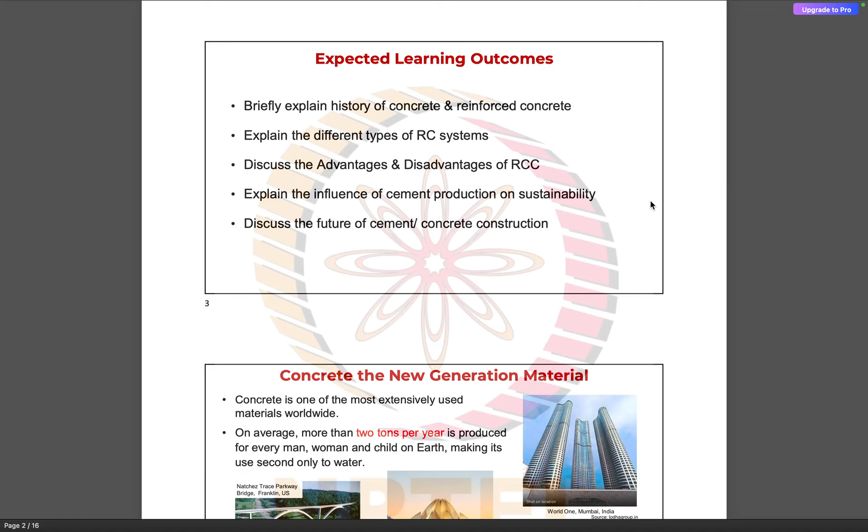So we first saw the history of concrete and reinforced concrete. Then we saw the different types of RC structural systems. Then we discussed the advantages and disadvantages of RCC. Then we saw the influence of cement production on sustainability, because environmental sustainability is a very important topic these days. Then we also discussed the future of cement concrete construction.

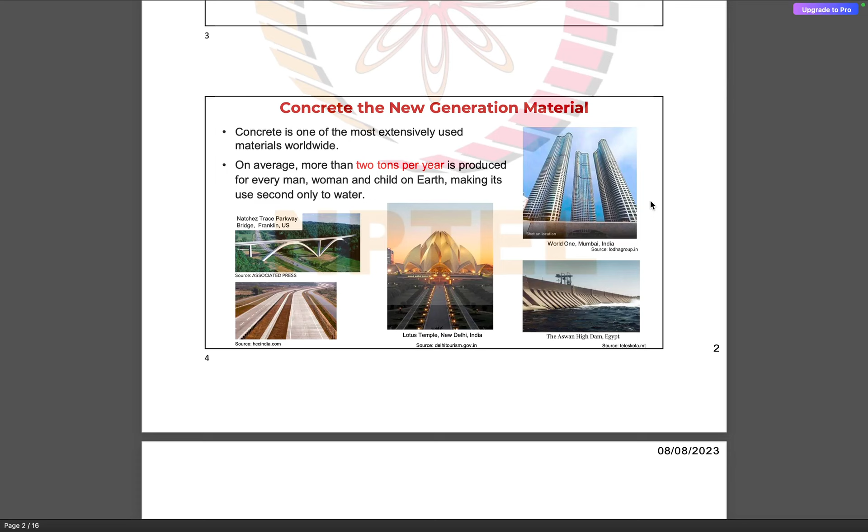So here, in this slide, we saw that there is a huge amount of consumption of concrete these days, and it is second only to water.

Then we saw a brief history of the evolution of reinforced concrete buildings, starting from John Smeaton and his discovery of concrete, followed by the discovery of Portland cement, and then Joseph Monier and the Hennebique system, which is very close to the present reinforced concrete construction.

Then we also saw some of the historical structures which have been constructed using reinforced concrete. For example, the Roman Pantheon, which was constructed using concrete almost 1900 years back, and it is still standing, which is testimony to the durability of concrete as a construction material.

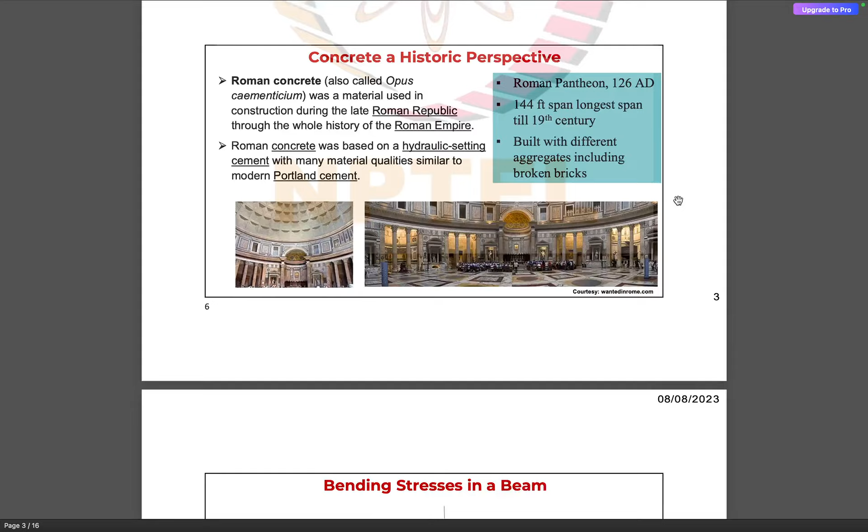Then we discussed the bending stresses in a beam, what happens when a beam is subjected to flexure, how it is subjected to compressive stresses and tensile stresses, which are separated by a layer of zero stress, which is also called the neutral layer or neutral axis. Then we saw the Hennebique system, which was developed by a French engineer.

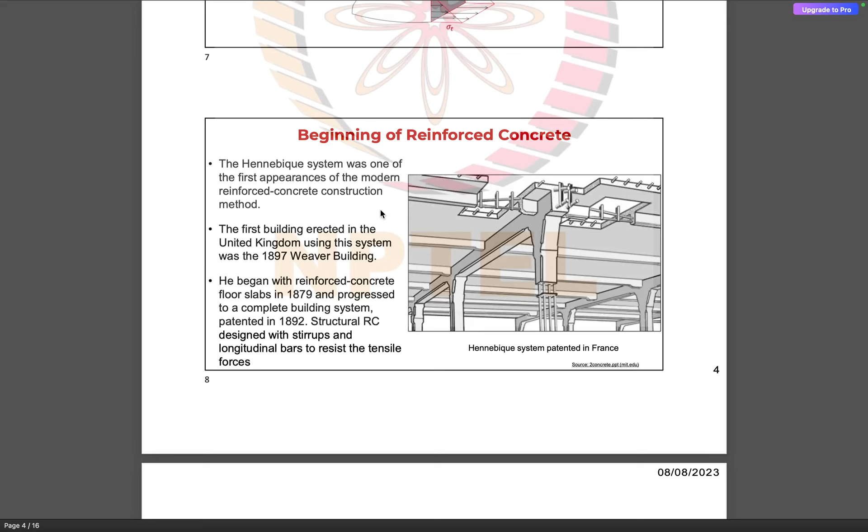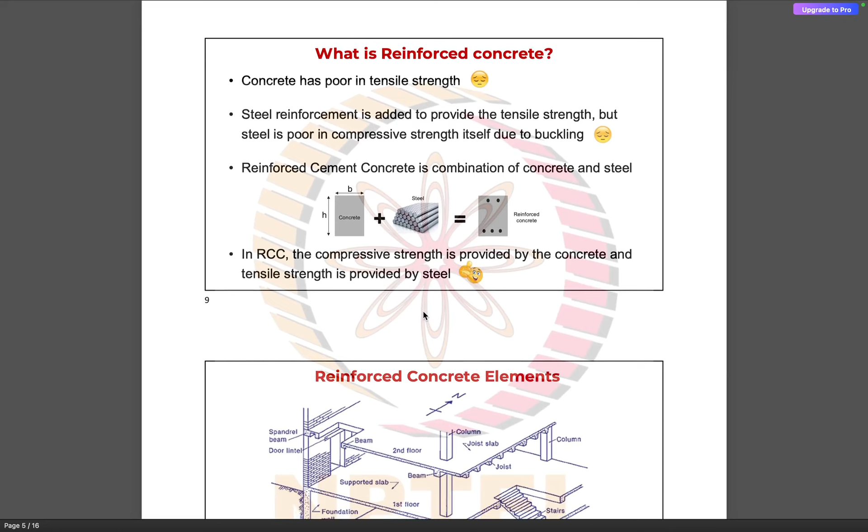Then we saw that concrete is essentially poor in tensile strength, and it must be combined with steel in order to attain the desirable tensile properties. And then we saw how both of them are compatible with respect to the thermal expansion coefficient, which makes it a very useful material for construction.

Then we saw the different components or elements used in reinforced concrete construction. For example, the load is initially applied on the slabs, which is then distributed to the beams and further to the columns, and then eventually to the lower story columns, followed by the foundation, and ultimately all the forces are transmitted to the soil.

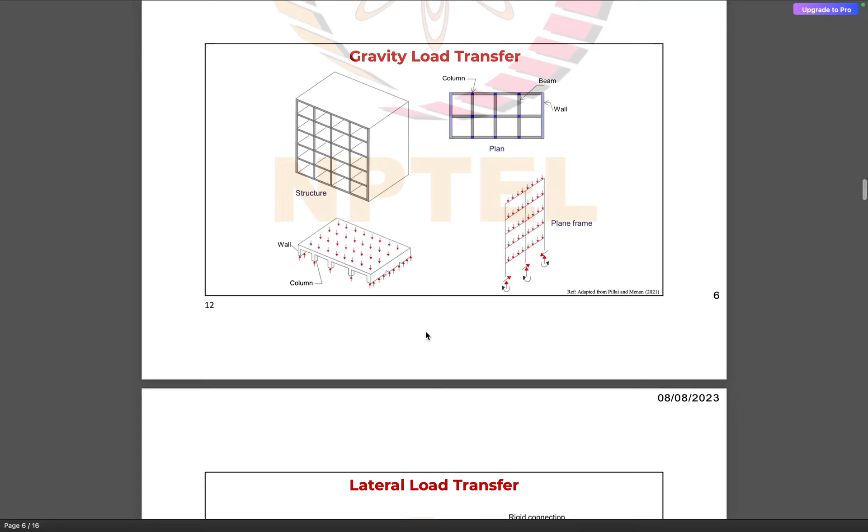So then we looked at the different systems, such as the flat slab system. Then we saw the gravity load transfer and the lateral load transfer. So essentially in the analysis and design of a building, the gravity load elements and the lateral load elements are considered separately, and it is going to be discussed in future lectures how to consider their design.

So then we looked at some of the very interesting structural systems on which present reinforced concrete construction is based. We started with the non-rigid frame, followed by the rigid frame, then the braced frame, outrigger trusses, tubular systems, and so on, which help us achieve reinforced concrete buildings of greater and greater heights with enhanced stiffness.

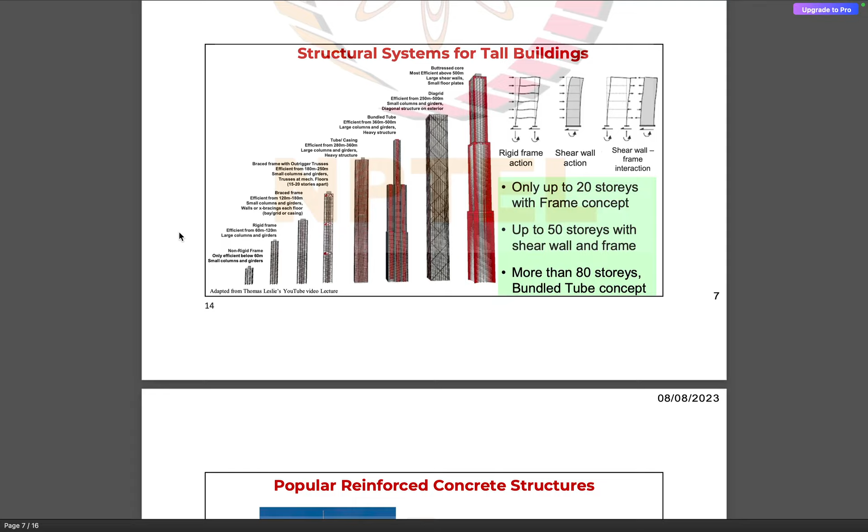Then we looked at the structural systems underlying some of the most prominent structures, such as the Burj Khalifa, which involves a tubular system, and then the Petronas Towers, which involve a tubular structure with shear walls and concrete frames. Then in our own country we have the World One Towers.

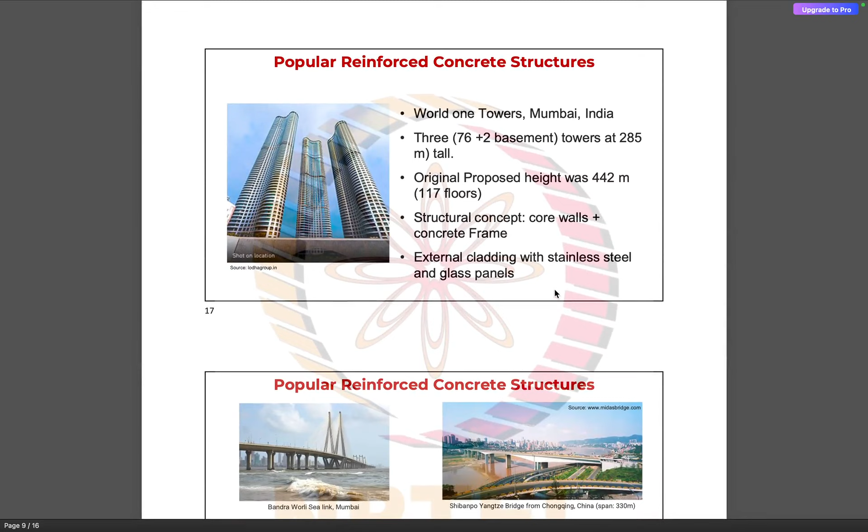Apart from buildings, we have other engineered structures also, such as the Bandra Worli Sea Link and the Sheikh Zayed Bridge, and so on. All these forms of construction are made possible because of the properties that reinforced concrete possesses. And then we looked at hydraulic structures also, such as the Gordon Dam and the Bhakra Nangal Dam.

So here we discussed some of the advantages of reinforced concrete in comparison to other construction materials, such as its higher compressive strength, greater resistance to fire and water, higher rigidity and long service life. Most of the structures have been able to sustain all these years because of the long service life offered by reinforced concrete as a material.

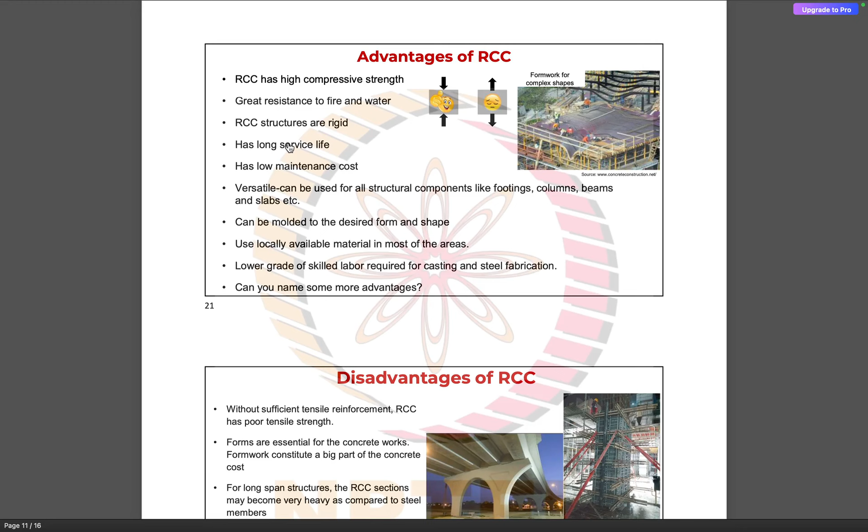Then we looked at some of the disadvantages also, such as the necessity of providing tensile reinforcement in order to make the structural elements sufficient under tensile stresses. Then formwork is an important part of the construction, which can increase the time taken and also the costs by a significant margin.

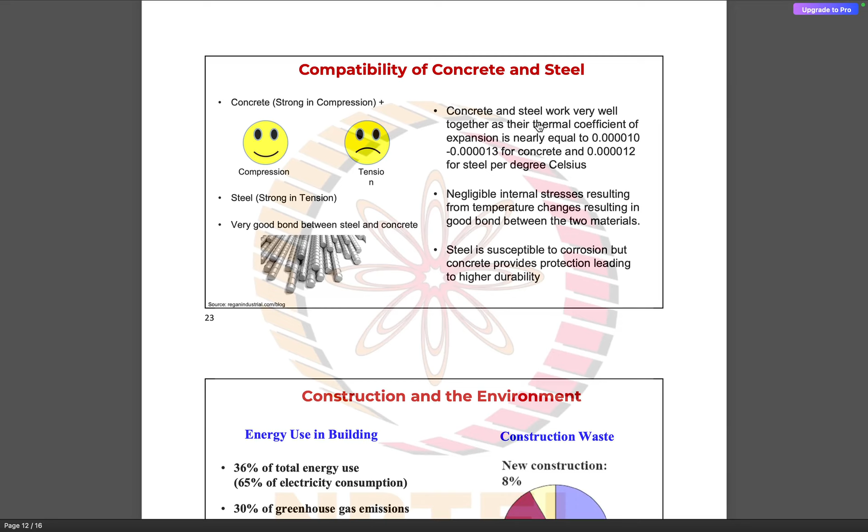Then, as I discussed, we are able to combine concrete and steel to develop reinforced concrete because they possess similar thermal coefficients, as a result of which there will be no residual stresses, and their mutual compatibility is a boon for the reinforced concrete industry.

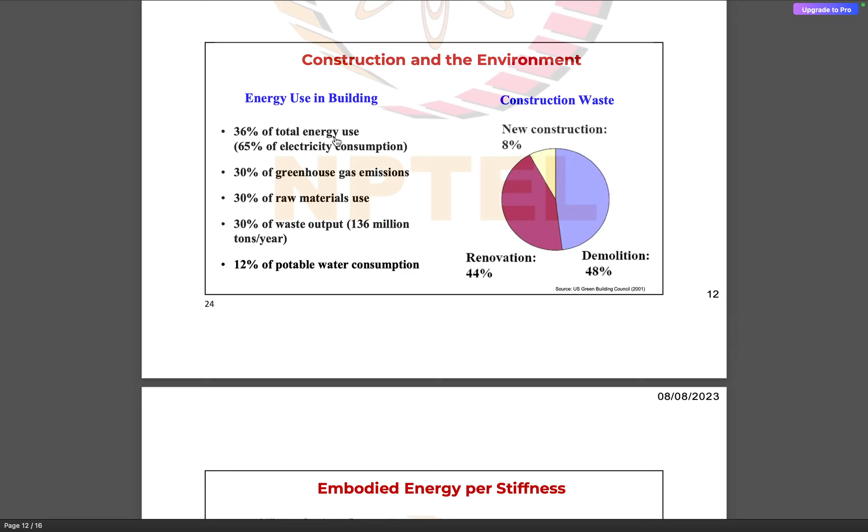Then we looked at the sustainability aspect, how buildings contribute to 36% of the total energy consumption. A lot of energy is dispensed in the manufacturing of raw materials and during the construction process. Most of you might be aware that we need to limit global warming to 1.5 degrees Celsius by the end of this century. So it is very essential to incorporate sustainability practices in our construction industry, so that we can contribute to a greener planet.

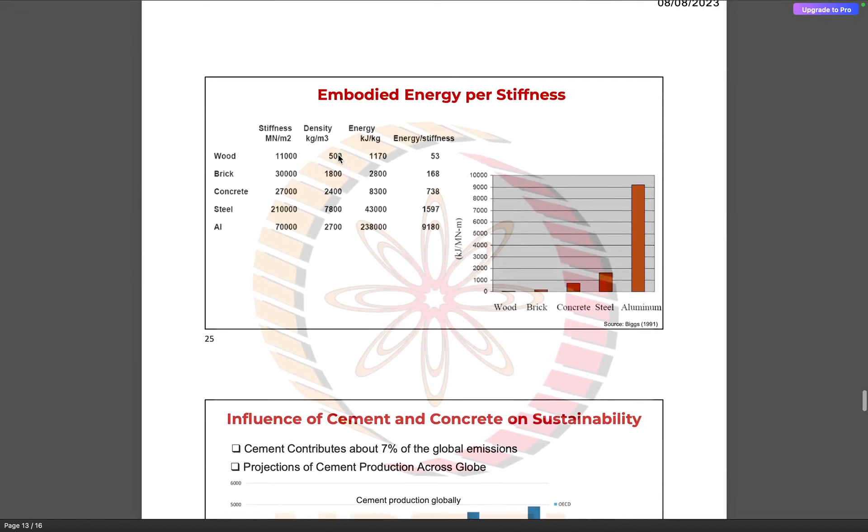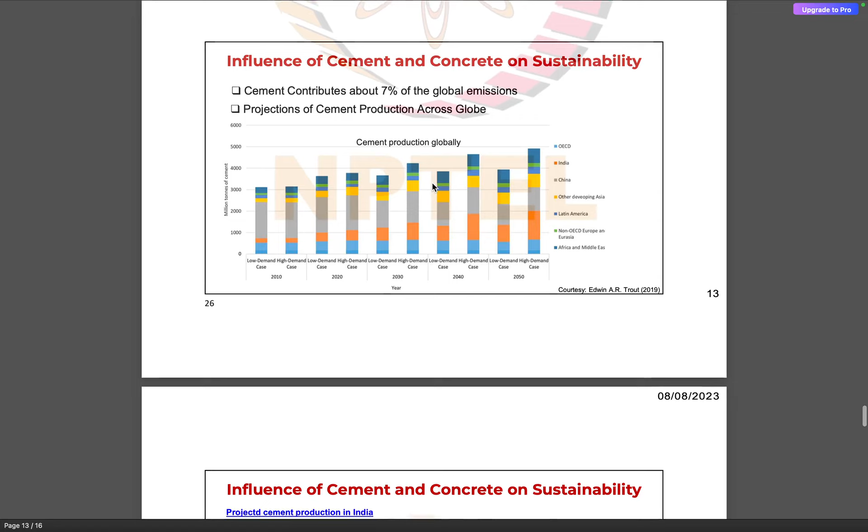So this is the embodied energy, and concrete compares very well in terms of energy compared to steel and aluminium. Then we looked at the trends of energy consumption, and we also looked at some other alternatives such as geopolymer concrete, which can reduce emissions and help us attain our sustainability goals.

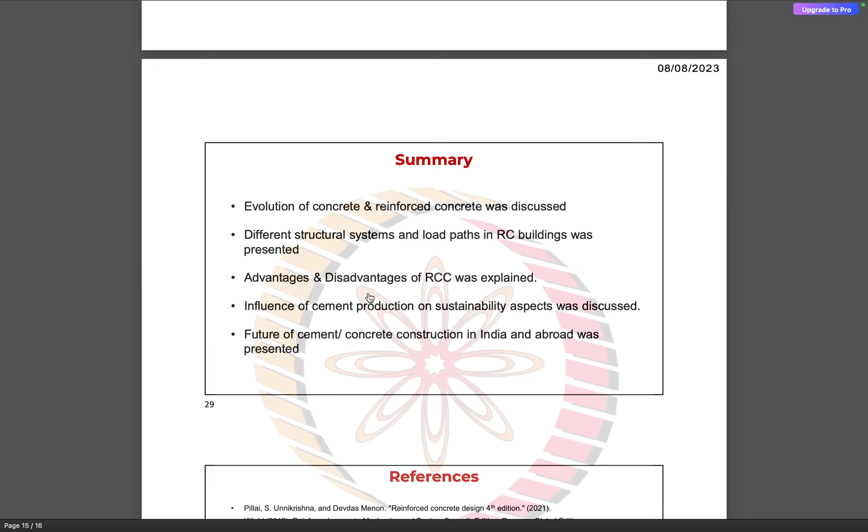So in summary, we saw the evolution of concrete, then the different structural systems, advantages and disadvantages of reinforced cement concrete, followed by the sustainability issues. So I hope all of you are with me so far.

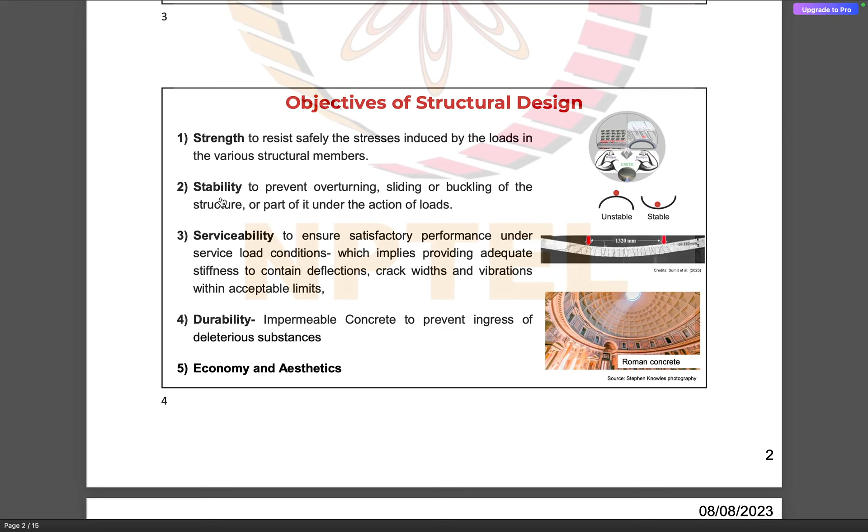So over a period of time, there have been different design methodologies that have evolved in order to help us in the design of reinforced concrete structures. Then we have looked at the difference in the design philosophy between the ACI, that is the American code, and the Indian code. So these are some of the objectives of structural design: to ensure adequate strength, stability, serviceability, durability, and economy and aesthetics. So we'll be discussing in detail about these aspects such as strength and stability in the upcoming slides.

Then these are some of the aspects of structural design we need to consider. That is, it has to be functional. We have to take into consideration the functional and safety aspects. Then we have to perform our design within certain constraints. Further, we need to follow a certain procedure in the reinforced concrete design. Then we need to take into account the different stakeholders, so that ultimately we are designing a building for the owner or the people who are going to inhabit there. So we need to work in an integrated way in order to ensure that the objectives for which the building is being constructed are being served.

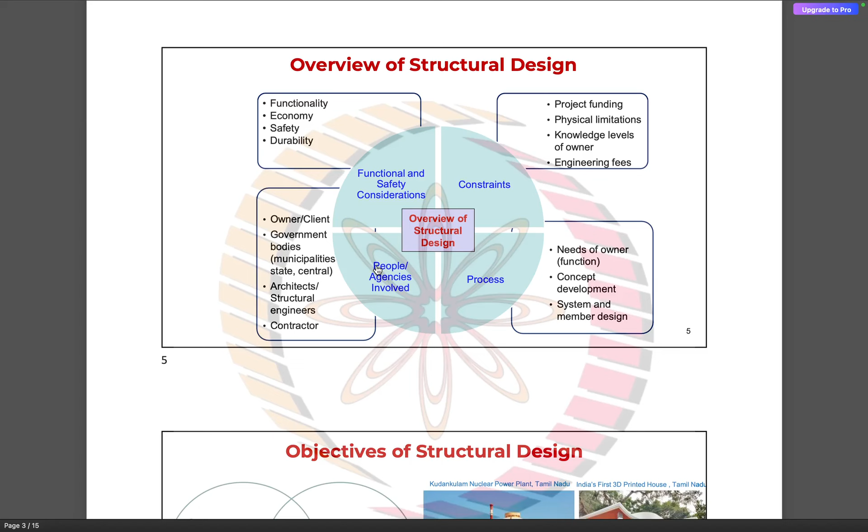So here we can see that there are different types of structures which have been designed, and we need to take into consideration all these aspects. However, the contribution of one factor can be different for the other. For example, for a nuclear power plant, it's a very important structure, so the functionality and structural adequacy become important aspects, whereas the economy can be overlooked to a certain extent.

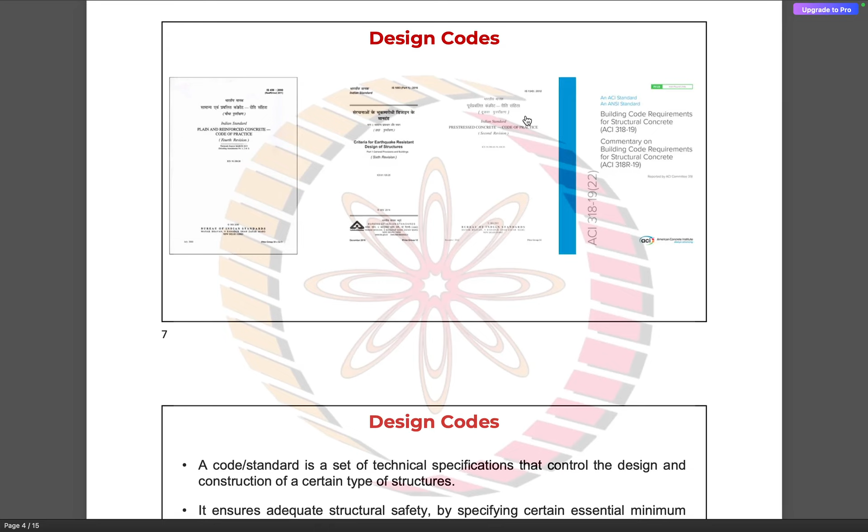And these are some of the codes that we have. So for reinforced concrete in India, we have IS 456, as all of you know, and IS 1893 for earthquake resistant design, and for pre-stressed concrete we have IS 1343. So these are some of the factors why the design codes are required.

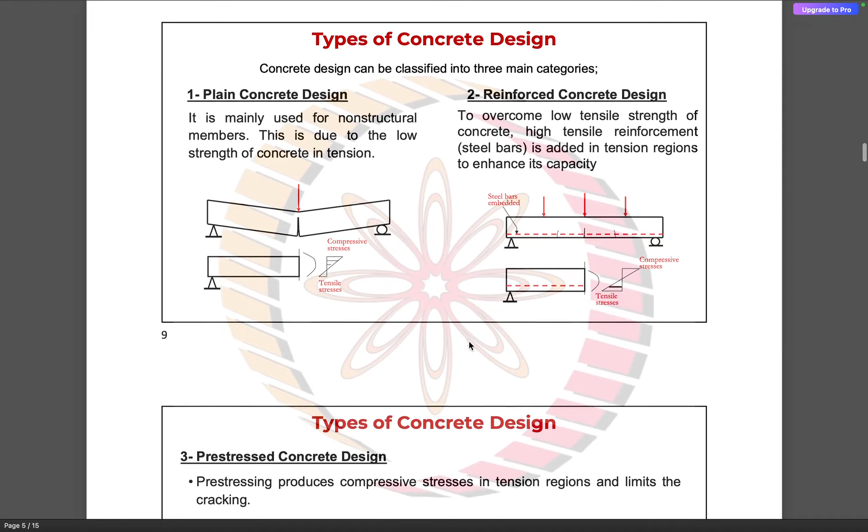Then we have the different types of concrete design. We have essentially three types of concrete. One is the plain concrete. Plain concrete is very rarely used in actual practice because of the lower tensile strength that it possesses. However, reinforced concrete design is what we're going to be covering in this particular course. Then you have the pre-stressed concrete, which is a very interesting material.

Excuse me, sir. Sir, generally, where do we use plain concrete in the construction industry? So plain concrete is very limited in its application, wherever we are not expecting tensile stresses to develop. So we can say that its application is considerably less compared to the other two forms of concrete design.

Generally, these are typically used in stubs, predominantly compression members. When you know that absolutely it is not going to have any tension, then plain concrete can be used. And especially in bridges or sub-base courses, even in slab on grade applications, we put reinforcement only for temperature and shrinkage. But otherwise, for structural requirement, we don't really put any reinforcement. There are some very limited applications, where even before the foundation comes, we put a simple layer of PCC, right? So for such applications, predominantly compression, we will use this. Thank you for clarifying, sir.

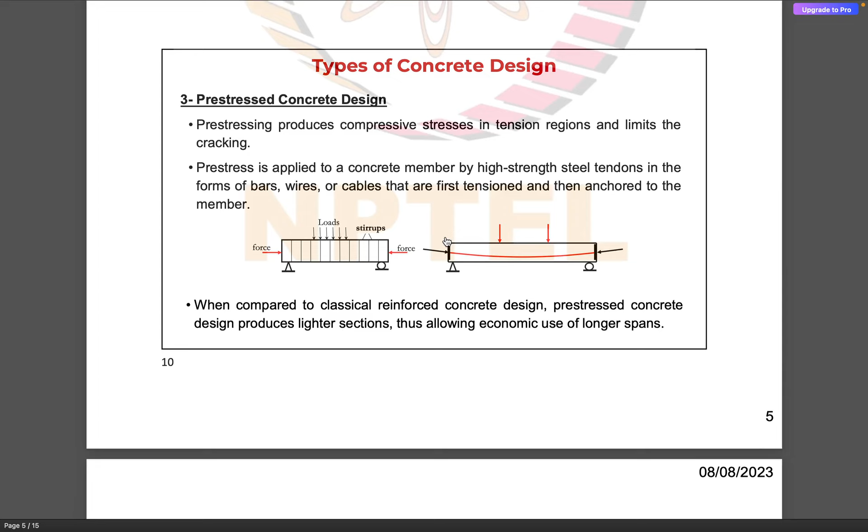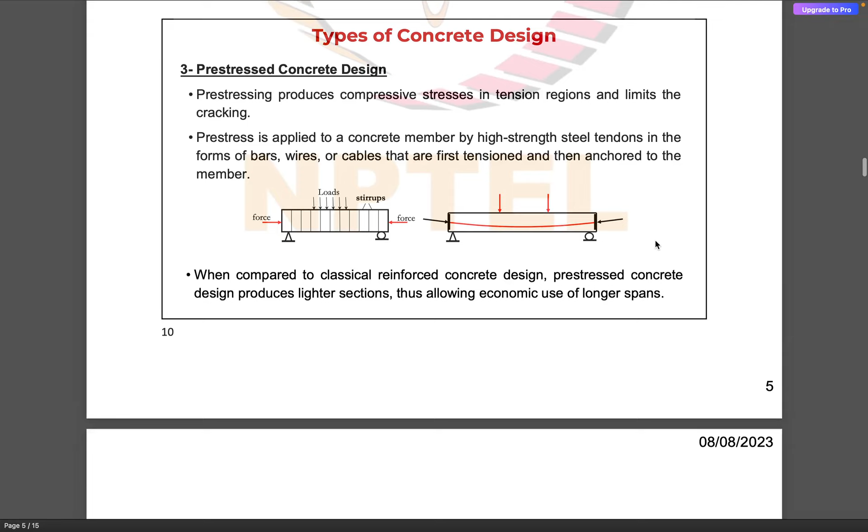So we have pre-stressed concrete, where the members are pre-stressed to a certain degree, which makes them eligible to take up the tensile stresses. So instead of reinforcing steel, we use these tendons in order to induce stresses within the members. So then we have the concept of design versus analysis.

So analysis is essentially the process of determining the stress resultants, such as the axial load, shear force, and the bending moment, and the displacements. However, design is to determine the cross section, the reinforcement, and the structural detailing in order to resist these stress resultants.

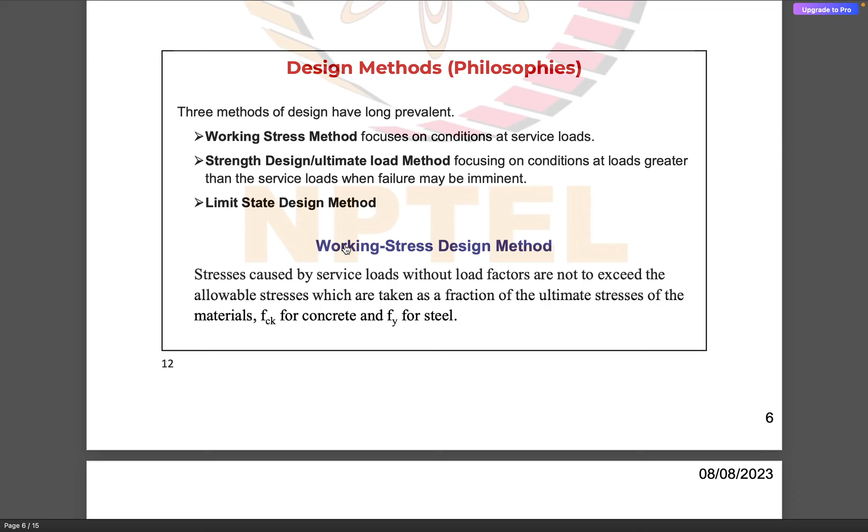So moving forward, we have the design methods, such as the working stress method, the ultimate load method, and the limit state design method. These we will be covering in greater detail in the questions that I have formulated today. Then we have the probabilistic analysis and design, which is the basis for the limit state method of design.

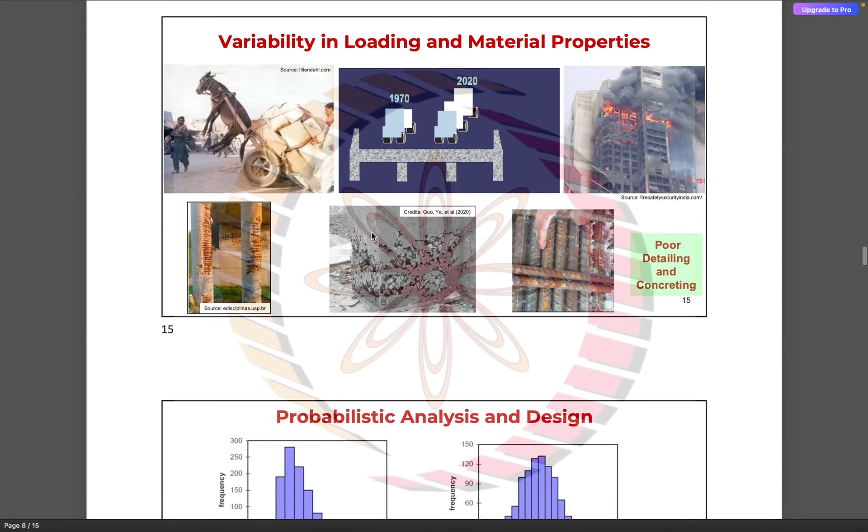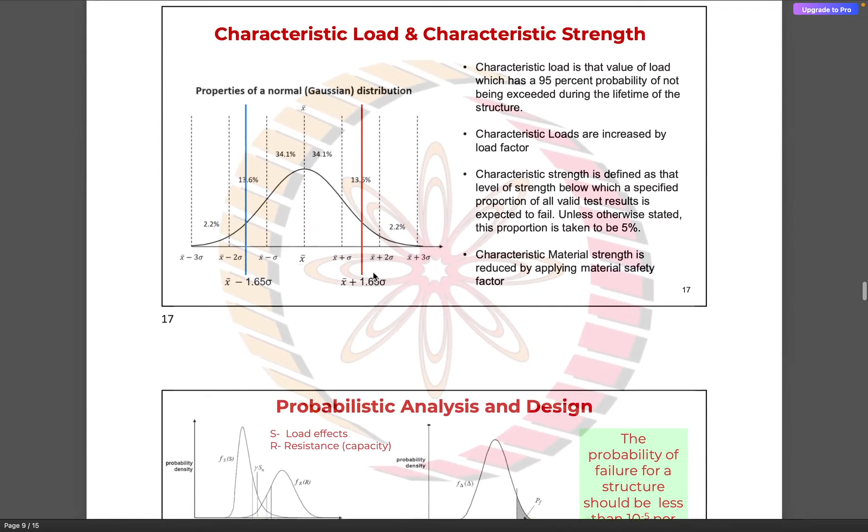So here we account for the variability in the loading and material properties, and the variability tends to follow a normal or Gaussian distribution, and all our partial safety factors have been adopted based on the distribution that it follows. So we have the characteristic load and the characteristic strength. We need to always ensure that the strength is greater than the demand.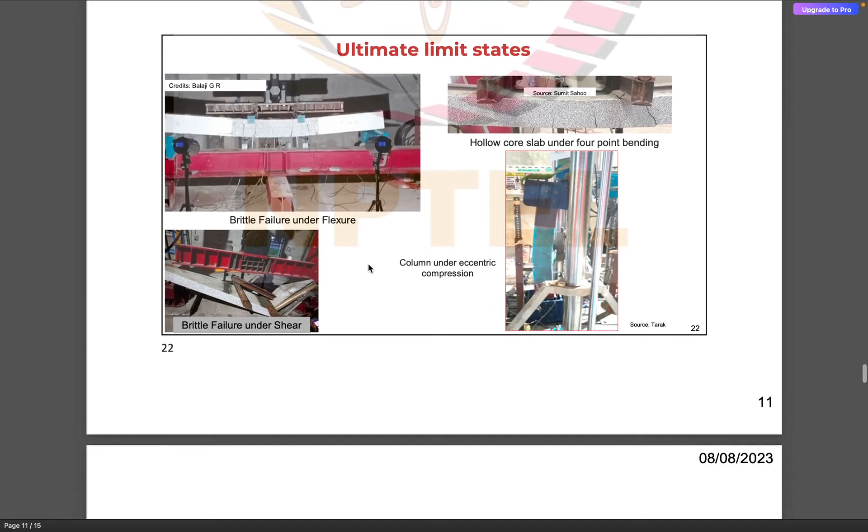So some discussion on the partial safety factors. We have certain limit states: ultimate limit states and serviceability limit states. We'll be looking at these aspects in more detail in the upcoming questions.

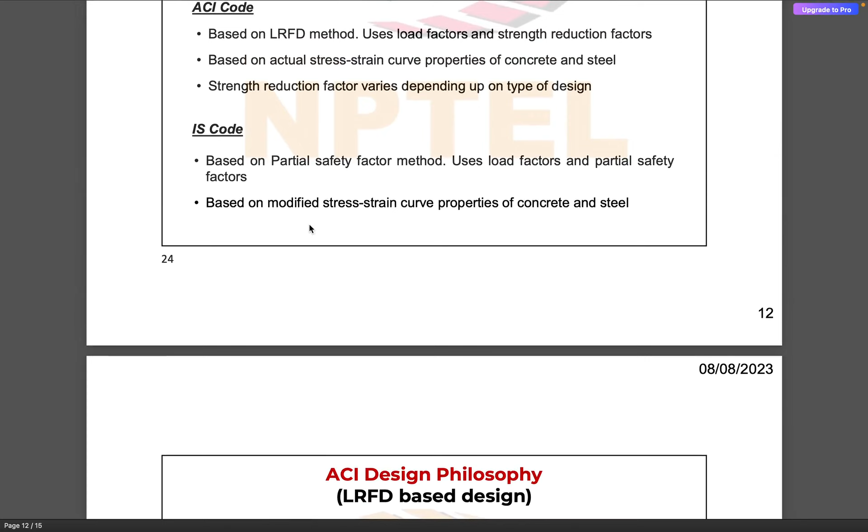So these are some of the differences between the ACI code and the IS code. The ACI code is based on the load and resistance factor design approach, whereas the IS code is based on the partial safety factor method. The ACI follows different strength reduction factors for different types of failure, whereas the IS code follows a uniform partial safety factor. So this is one major difference between these two approaches.

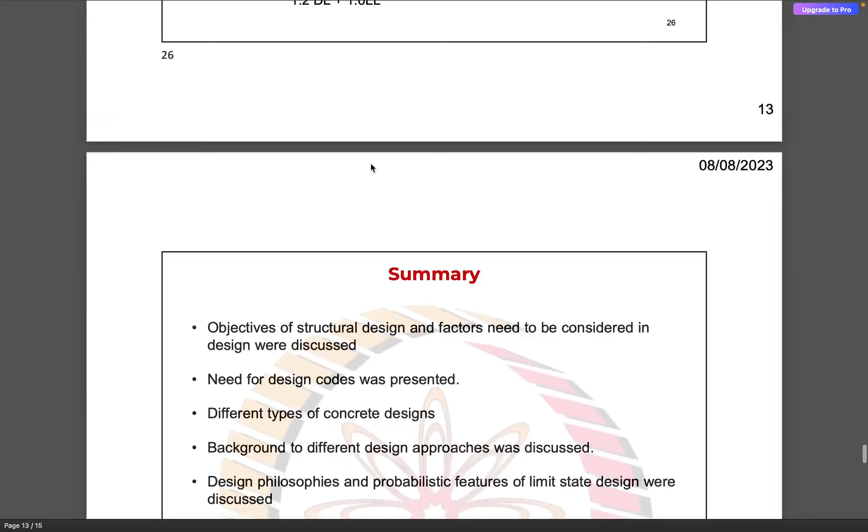So in the second part of the first module, we looked at structural design and the factors that need to be considered, followed by the necessity for design codes. Then we looked at the different types of concrete design, and the background to the different design approaches, namely the working stress method, the ultimate load method, and the limit state method, and how the theory of probability can be used in limit state design. So I hope we are ready to start with the multiple choice questions.

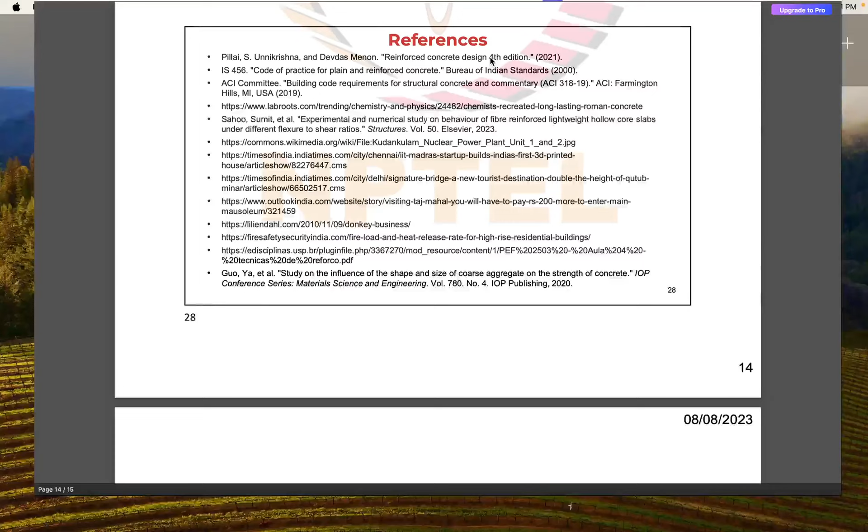Sir, one question. Yes, please. Sir, when we construct bridges, dams, or heavy structures like nuclear plants, generally we design with WSM. And when we construct residential buildings, we use LSM. Why are we not using LSM design in bridge construction or dam construction?

So to my knowledge, the basic difference between the working stress and limit state method is that the factor of safety is more on the conservative side for the working stress method. But I would like to add that all present structures are mostly based on limit state design only. Yeah, I think you're absolutely correct, Lalit.

Just to add on, even bridges are now designed using the limit state method only. The working stress method is used only in certain cases, like special structures such as water tanks, where you are allowed to use working stress, or where the serviceability condition controls the design. Otherwise, all design codes are based on the philosophy of limit state design. Even for steel structures, before 2007 we were using the allowable stress method, but there too they have now switched to the limit state method.

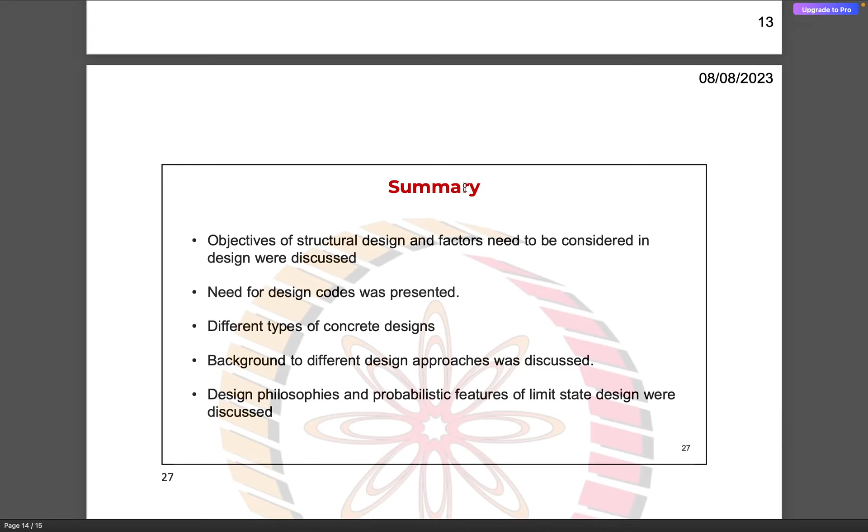Okay. As Lalit said, the factor of safety is much higher, but the factor of safety is not uniform, as explained in some of the videos. Here, it's a much more rational approach. You also take care of the variability in the loading and the variability in the material properties, in a much more rational way, in a probabilistic sense. That is the reason it is the more advanced method adopted by codes all over the world. Yes, sir. Thank you, sir.

So we are going to be starting the question and answer session. There are 15 questions. I hope we'll make it a very interactive session, and I hope you enjoy the questions that have been prepared.

So what is the role of transverse steel ties in reinforced concrete columns? Select multiple options. Can any one of you volunteer?

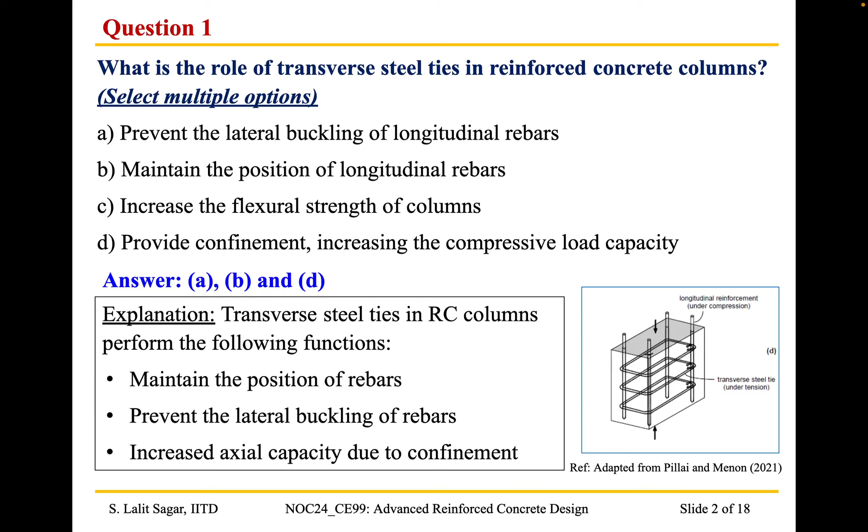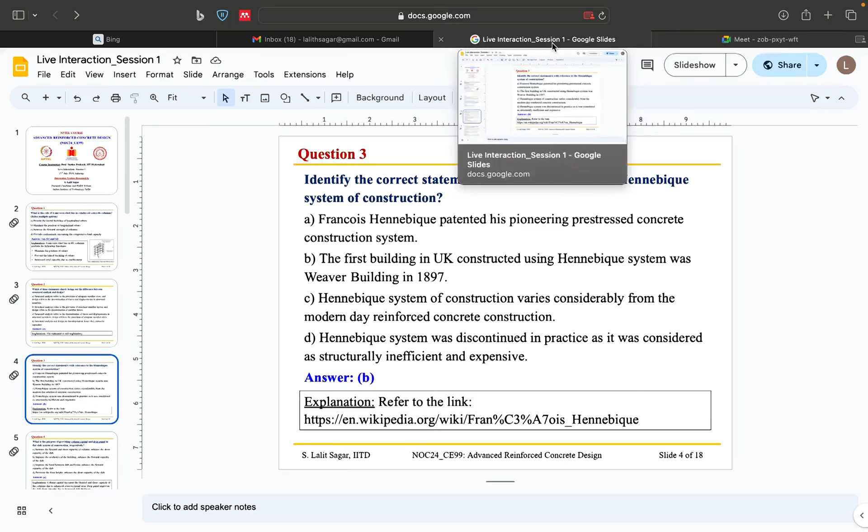Hello. I hope I am audible. Yes, sir. Was the connection not stable in between? It was stable, sir. Okay, okay.

So, as I was discussing in the initial slides, the Hennebique system was introduced by a French engineer. He patented his pioneering design for reinforced concrete, not pre-stressed concrete. Pre-stressed concrete came much later, around the 1930s or something. And in the United Kingdom, the first building to be constructed using the Hennebique system was the Weaver building in 1897. So this was the correct answer.

Then statement C, Hennebique system of construction varies considerably from modern day reinforced construction. This is wrong, because the Hennebique system is very much similar to modern day RC construction. Then, Hennebique system was discontinued in practice as it was considered inefficient. Again, this statement is wrong, because the Hennebique system is the basis of present day reinforced concrete design. Despite the system being introduced almost 125 years ago, it laid the foundation for the present day reinforced concrete construction which is happening so vastly as we know.

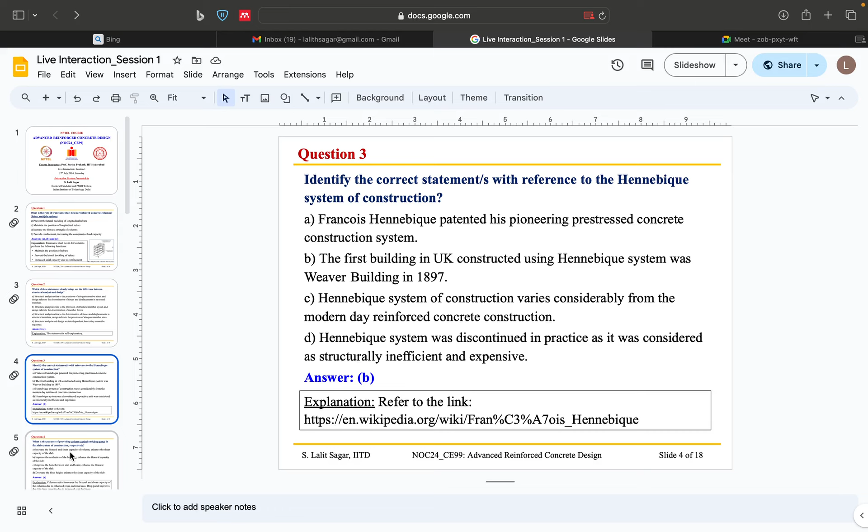Am I audible? Hello? Yes, it's audible. Yes. Okay.

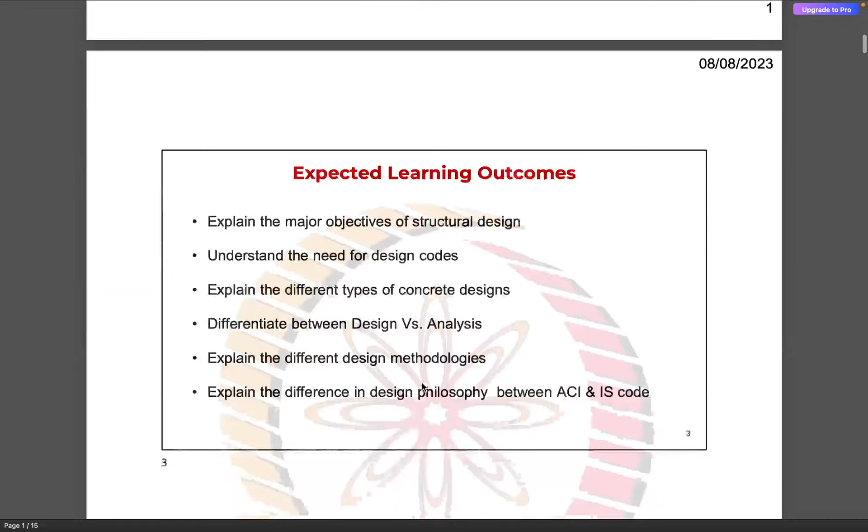So I would like to just show you again the diagram of this flat slab. I think it's in the second one. Or probably it's in the first one. Yeah, so I hope the screen is visible now. So we are looking at a flat slab system. So this is the column. Yes, so this is the column capital, which has a higher cross sectional area compared to the rest of the column. So it is sort of flaring out in terms of the area. So this area helps in providing greater moment and shear resistance for the column. And then this particular part is called the drop panel.

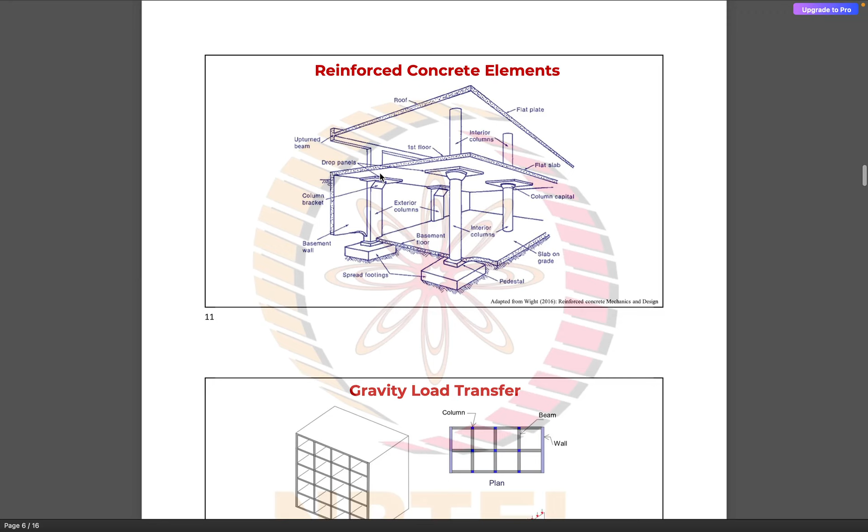So as professor mentioned in the lecture, there is a scope for punching shear. A beam is designed to resist the force coming from the column, but the slabs can be vulnerable to punching shear because of the concentration of the axial force. So this drop panel, by providing a higher depth, helps in improving the shear resistance of the slab. So the correct answer is option A, that is the column capital helps in improving the flexural and shear capacity, and the drop panel helps in improving the shear capacity. Option B is incorrect, and option C was provided just to confuse you.

And option D, in fact, we are able to decrease the floor height, and as a consequence, we are able to provide more stories. So, for example, for a height of 60 meters, if we are able to provide a 20-story building, we can actually provide 21 stories because we are not going to provide beams as such. So the flat slab system helps in adding additional stories in a structure.

Sir, column is not designed for flexure, na? No, column is designed for flexure also. But at the slab and column junction, how is the flexural design there at the junction? See, when you analyze a building, there will be member end moments, right? So basically there are three forces that you have to consider. First is the axial force, second the bending moment, then the shear force. So compared to other parts of the column, the ends tend to have a higher bending moment. So accordingly we need to provide the longitudinal reinforcement. Okay.

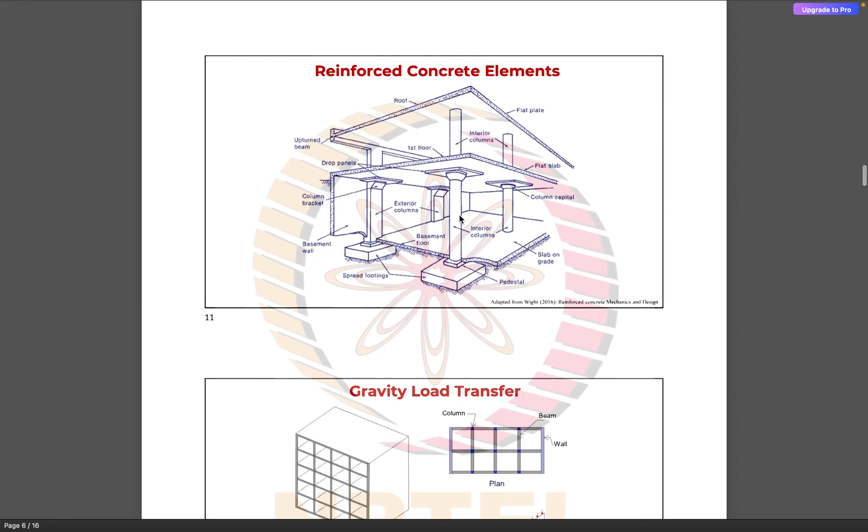So is this type of structure applicable for construction like 20-floor buildings, G plus 20? No, I was just giving an example, but for a 20-story building, you need to have a framed structure. So what I was trying to say is that this helps in... Yes, sir. Yeah.

Okay, so I can try to explain the previous one. Just give me 1 second. So I hope my speed is all right. Do I need to go slow or faster? Kindly comment on that. It is adequate. Okay, thank you. So let me... So the previous question one of you asked. I'm sorry.

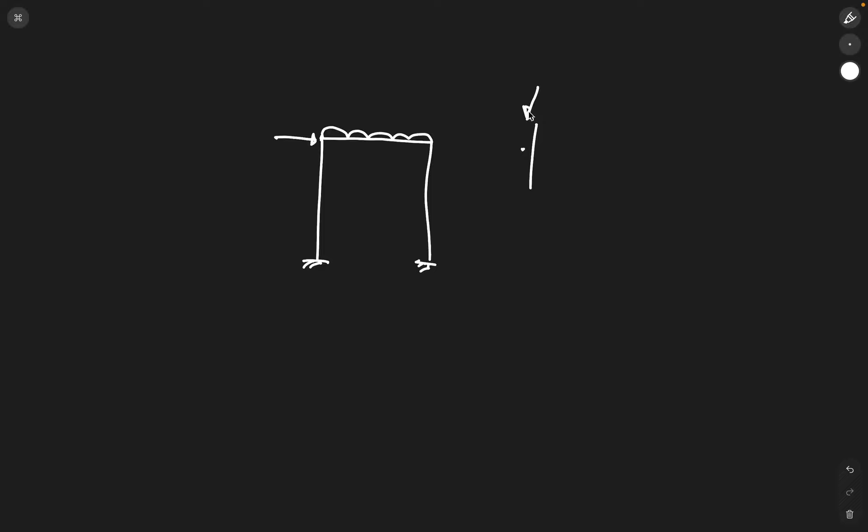So essentially, if you take the free body diagram of the column, if you separate the column, you will have to consider three forces. This would be the shear force, this would be the bending moment, and this will be the axial force. So whether it's a flat slab system or a framed system, we need to consider these three forces when performing the reinforced concrete design. I hope it is clear.

A participant who asked the question - hello, yes, yes, yeah. So we can move on to the next question. We have another 11 questions. I hope you are enjoying this. Oh, I'm sorry.

Okay, so we have a numerical problem which we are going to solve right now. You have a frame, symmetrical portal frame ABCD with columns 4 meter height, fixed at the base points A and D, and the beam BC has a span of 6 meters, and it supports a UDL of 100 kilonewton. After the analysis, it has been found that the reactions are 50 kilonewton, 30 kilonewton, and 40 kilonewton. So with the help of a free body diagram, can you determine the design bending moment and shear force for the beam BC? Can anyone take a pen and paper and quickly solve the problem?

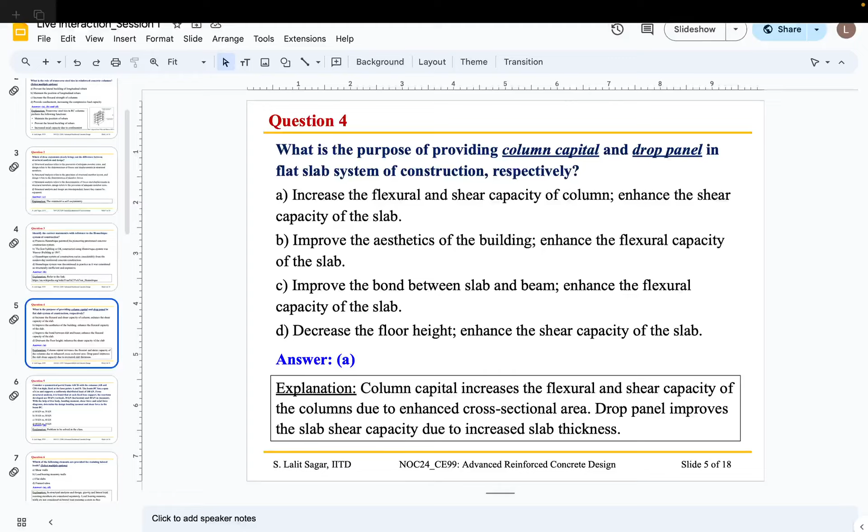I will try to make an illustration so that it is visible for all of you, just to make you understand. Oh, we could have kept that frame.

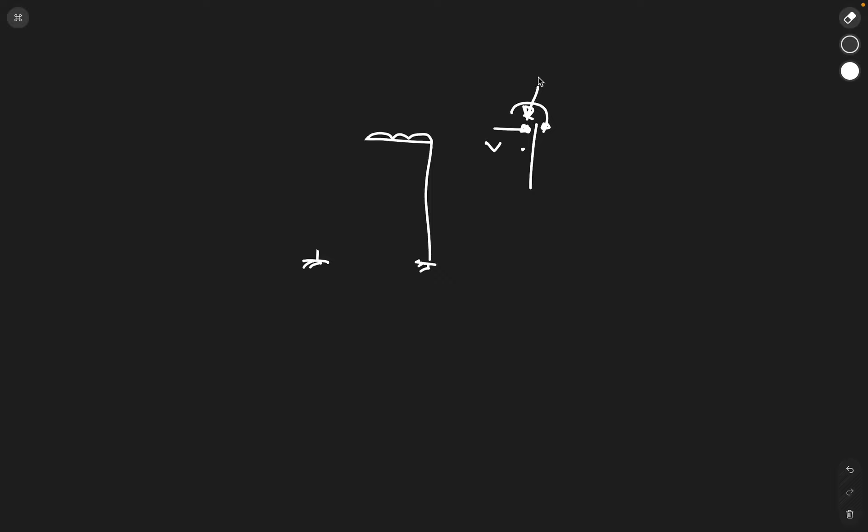Okay, so what we are looking at is this - 6 meter is the length of the beam, and the height of the column is 4 meter. Let's say it is A, B, C and D, and it is subject to a combined cumulative load of 100 kilonewton.

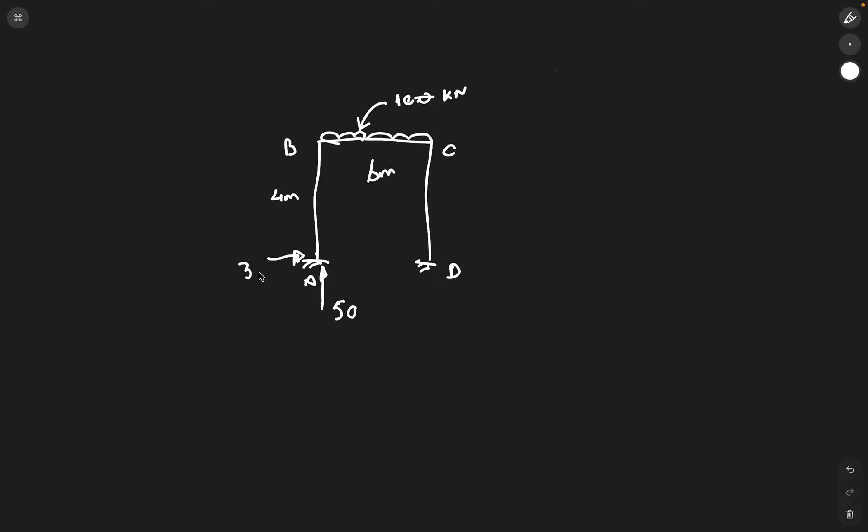Can any one of you try to solve this problem? I hope some of you are trying to solve along with me.

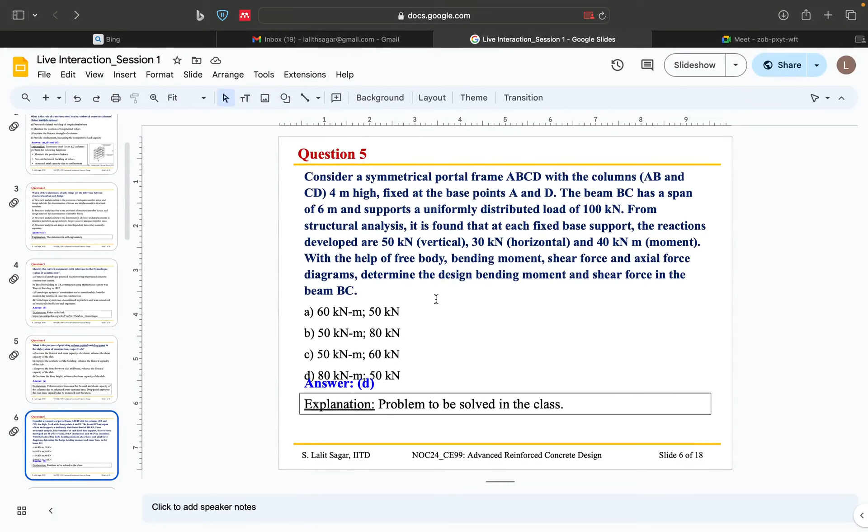So MB has to be... into 4. Yeah, I'm sorry, I think it has to be 30 into 4, no? 30 into 4 and 40, I think. Yeah, 30 into 4 and 40.

So if you do the calculation, it comes up to 80 kilonewton meter. You can verify it once again. And the shear force would be 50 kilonewton. So the correct answer would be option D, that is 80 kilonewton meter and 50 kilonewton. I'll be sharing these slides with you, so you can work it out at your home and ascertain yourself that you're getting the answer.

So we can move ahead, I think. Hello. Yes, sir. Yes. Okay, sir.

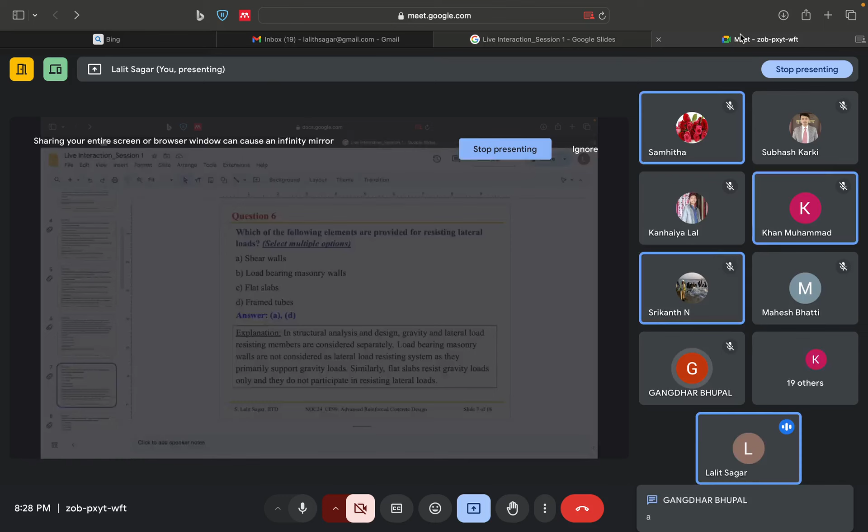So can anybody volunteer regarding this question?

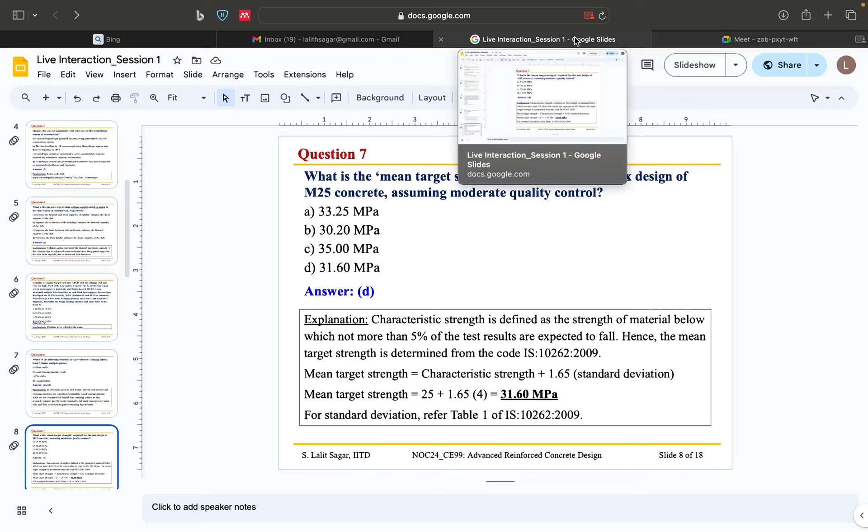The explanation is that practically it is difficult to obtain the direct tensile strength of concrete, as it is difficult to apply pure tensile load free of any misalignment and secondary stresses developed at the grips of the testing machine. We test concrete cubes under compression using a UTM machine, but in a similar manner we cannot capture the tensile behavior adequately. For example, if we are testing cubes of strength 25 MPa, it might fail at a load of just 2 or 3 MPa, and it is extremely difficult to apply pure tensile load. So we try to find the indirect strength of concrete under tension using the modulus of rupture and splitting tensile strength, and some of you might even remember this from the slides.

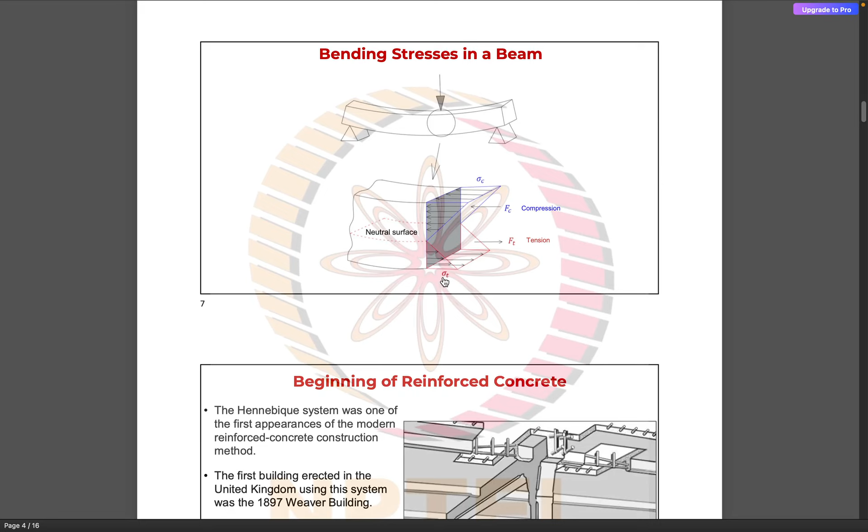In splitting tensile strength, we take a cylinder and apply a vertical load like this. If the load at failure is P, we determine the splitting tensile strength using the equation 2P by pi dl. This gives an indirect estimate of the tensile strength of concrete.

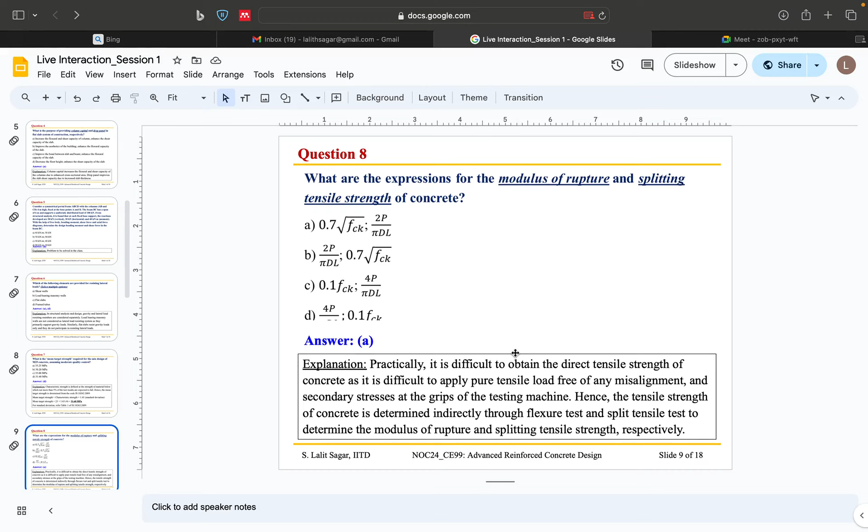This is plain concrete, just for your information, and we are not discussing reinforced concrete. This strength refers to the plain concrete. Okay, moving on.

Anybody else would like to volunteer? So the answer is absolutely correct.

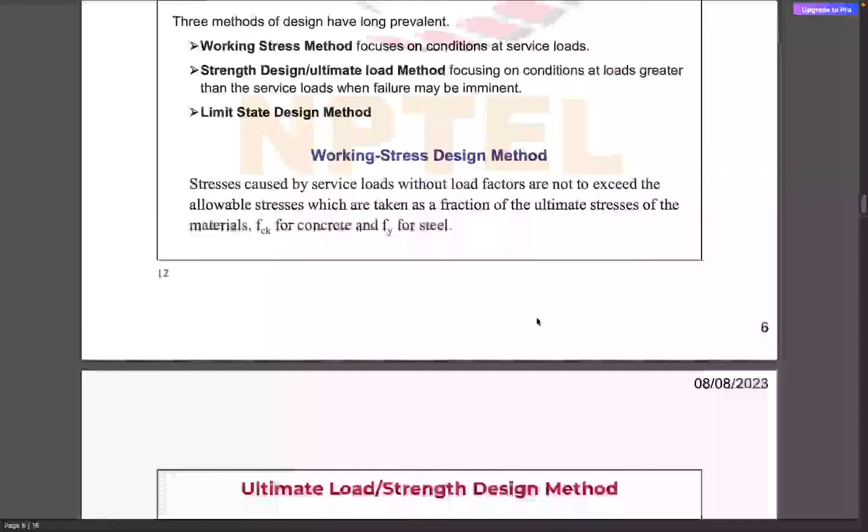So basically we have two aspects: on one hand we have strength, and on the other hand we have the effect. The resistance has to be greater than the loading effect in any of the three design philosophies. So that is what we are looking at.

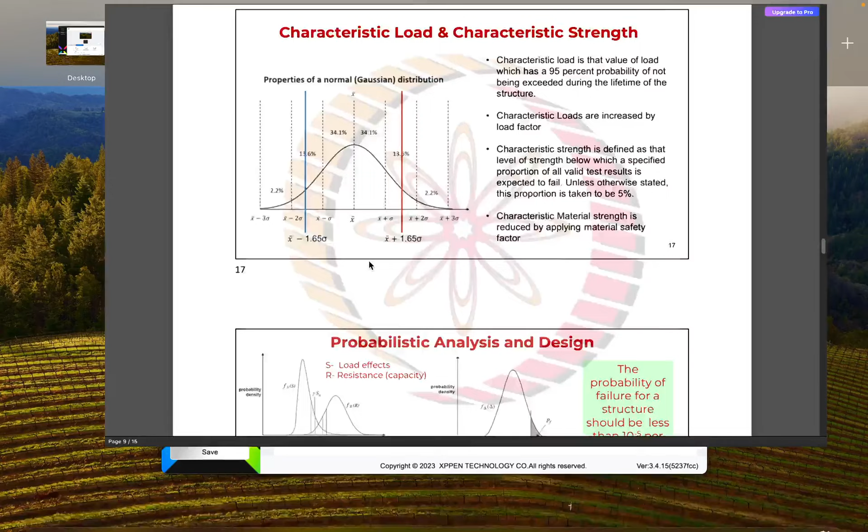In the case of the limit state method, we are going to increase the loading effect also, and we are going to reduce the material resistance by a suitable partial safety factor. And D is an incorrect statement which does not correspond to any of the design philosophies.

So moving on. What is the difference between deterministic design and probabilistic design?

C. Okay, any other answers? So A. Okay, A, A, okay, any other answers?

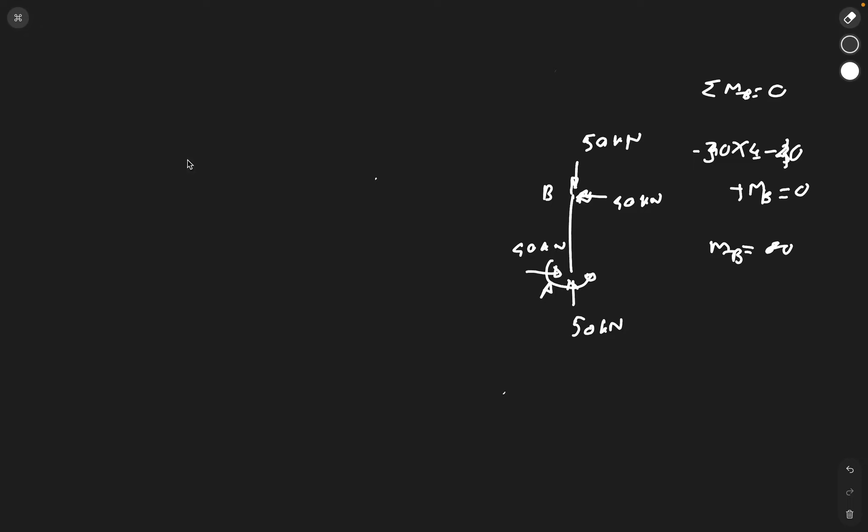As I was telling, we have the working stress method, and then we have the ultimate load method.

In the ultimate load method, the resistance is not affected, but we are considering the loading effect amplified by a certain factor of safety. So let's say, for example, we are amplifying by a factor of 2 or 3.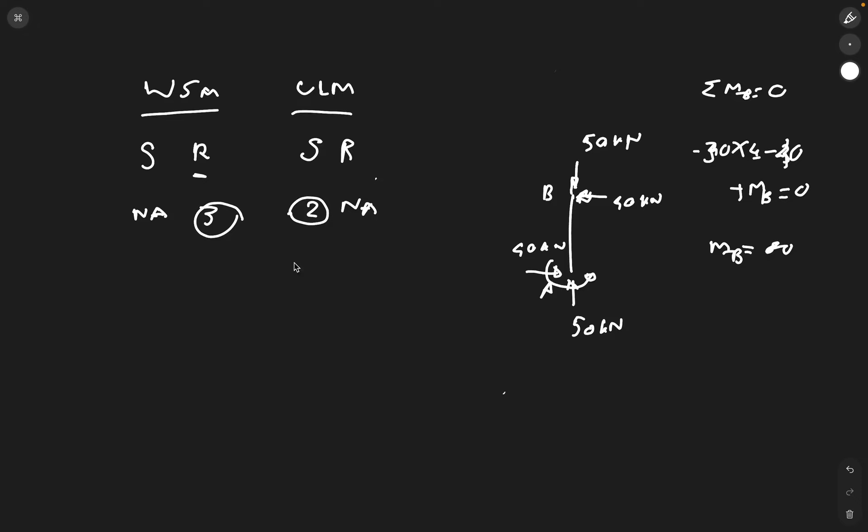How are these numbers coming up? Anybody know? These numbers are purely based on engineering judgment. Nobody has told us that you have to consider 2 or 3. It is only by empirical knowledge that they were building structures, and the structures turned out to be safe.

So there is no rational basis in order to adopt these safety margins. So both the working stress method and the ultimate load method are considered as deterministic design. However, the limit state method, which we are currently following, is based on a rational basis, that is the probabilistic theory. So the partial safety factor that we are considering is based on probabilistic theory, and it is not merely based on engineering judgment.

So answer C is the correct option, that is WSM and ULM are based on deterministic theory and LSM is based on probabilistic theory. And this statement is incorrect because either the probabilistic design or the deterministic design can give conservative outcomes, so it differs from case to case. So I hope all of you are with me.

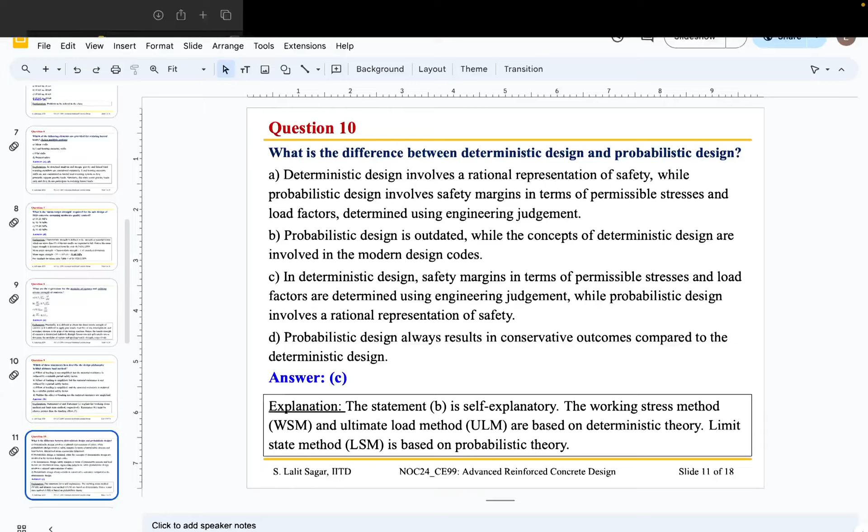So we have another 5 questions to discuss. Okay, so I think we can go ahead now. Yes, moving ahead. We'll try to wrap up by 9 o'clock.

A. Okay, so initially I think you gave the right answer, but I encourage all of you to participate. Whether it is right or wrong, we learn through mistakes. So I also learned a lot during the course of making this PPT.

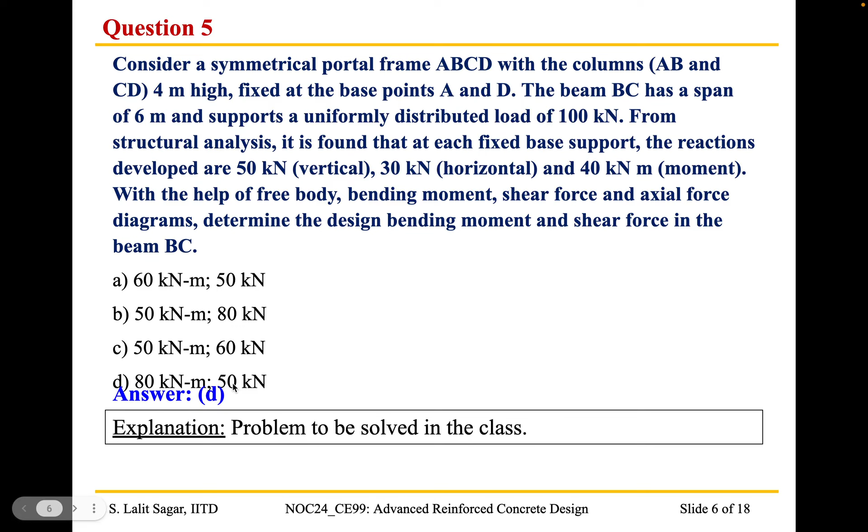For example, if you're designing a beam, as we did in one of the earlier questions, here we considered the loading effect, right? So we are going to design for these forces, that is this bending moment and this shear force. And once you design based on the ultimate limit state or the limit state method, then we are going to check for the limit state of serviceability criteria, that if a beam is able to maintain its crack width below a particular level, or it is able to avoid undesirable vibrations, or if it is within a given deflection limit.

So in essence, we are going to design structures for limit state of collapse, and we are going to check them for limit state of serviceability. So moving on, question 12. So this is a very interesting numerical question. I hope you can understand.

So to simplify, we have different load cases: dead load, live load, wind load, and earthquake load. The maximum moment corresponding to dead load is minus 50 kilonewton meter. Maximum moment corresponding to live load is minus 80 kilonewton meter, and wind load is plus or minus 120, because the direction of wind load and earthquake load can be reversed, and for earthquake load it is plus minus 180 kilonewton meter. So these are for particular load cases. We have to determine the ultimate design moment for the limit state of collapse considering the load combinations.

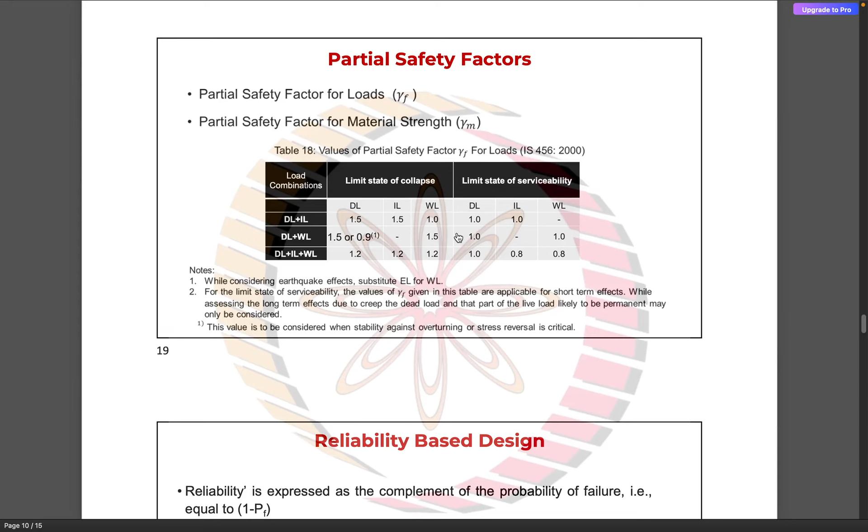So these are the different load combinations that we consider. So we have 1.5 dead load plus live load, then we have 1.5 dead load plus wind load. So we have different kinds of load combinations. So I think when I circulate, probably you can attempt this question.

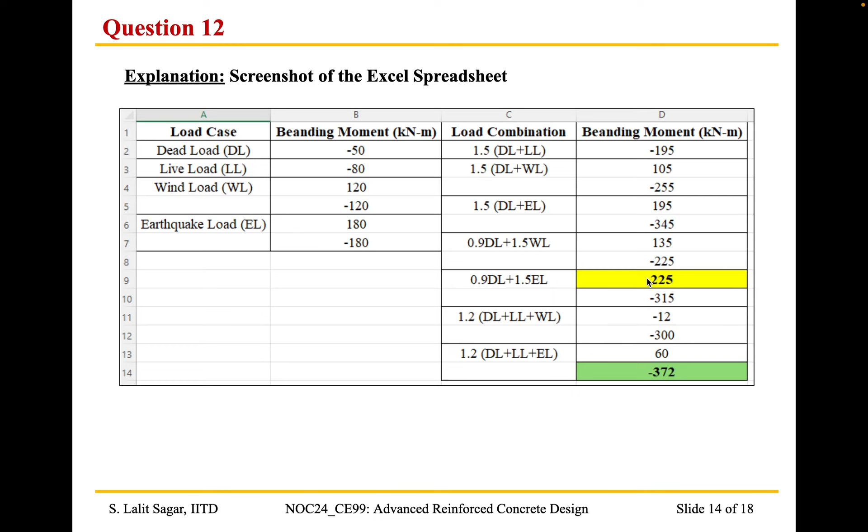So of all these load combinations, you have to consider the most severe loading effect. So the most severe loading effect turned out to be plus 225 kilonewton meter, that is sagging, and minus 372 kilonewton meter for hogging. So correspondingly, this is the answer.

I hope it is clear for the participants. Yes, sir. Okay. So there are 3 more questions. Without further delay, let's go ahead.

So which of these statements best describes the concept of code calibration? I think those in academics or industry might have come across this term. Have you? Code calibration or calibration of codes? No, sir. Okay, so it is a very important concept. You should try to attempt this question.

D. Sorry? D. Okay, D. D for Delhi. Yes, sir. Okay, thank you for your response. Anyone else likes to try? Option B. Okay, B for Bangalore. Okay, thank you. Anybody else?

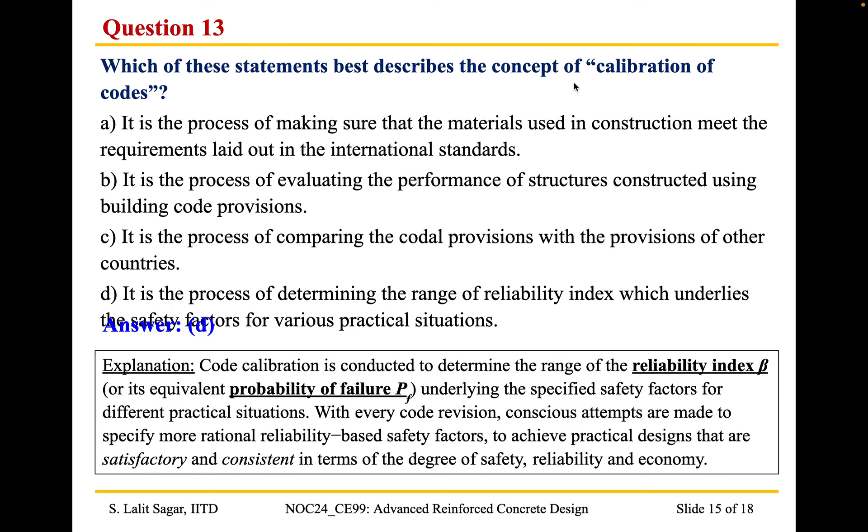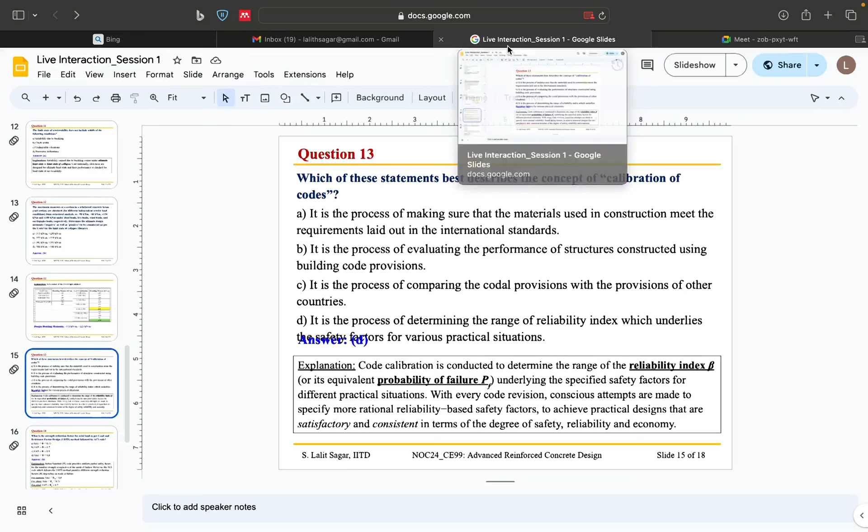We need to focus on the term axial load. In the Indian Standard Code, we follow a uniform partial safety factor for member strength, whether we are designing for moment, shear or axial. But in the LRFD method, based on the strength reduction factor, as we go towards the more brittle modes of failure, shear and axial failure, we reduce it by a higher margin. So if the theoretical strength is 100 kilonewton for a column, we consider only 65 or 70 kilonewton as its design limit.